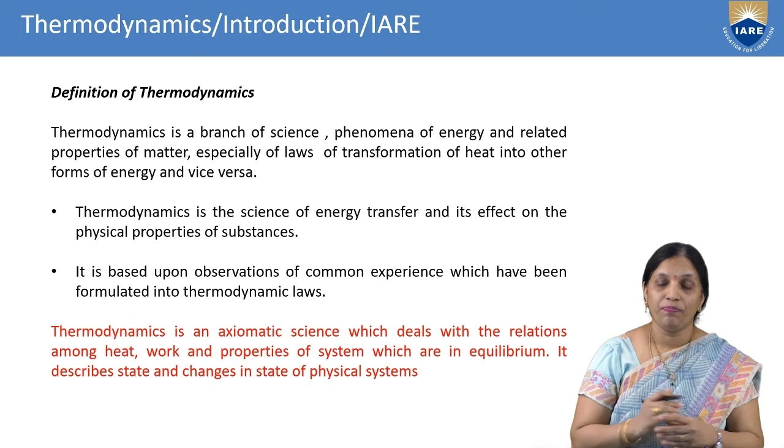Let's see where these thermodynamics are used. Whenever you are talking about some concept, first of all, what strikes in your mind? Why do we have to study this? Where are we using it? What is our application of this?

So when you see the applications of thermodynamic laws or principles, all fields of energy technology, like your power plants, whether it's steam power plant or nuclear power plant, your IC engines, the vehicles you use day to day life like two wheelers, four wheelers, or your gas turbines, your refrigerators, air conditioning systems, propulsion systems, gas dynamics, compressors, and of course your chemical process plants, etc.

So these are all the day to day applications. If you want energy, if you want light at your home, you need a thermal power plant to be there. If you have to convert thermal energy into mechanical energy, this energy transformation is where thermodynamics comes into the picture.

In an internal combustion engine, the combustible mixture burns inside the cylinder and releases energy, which is used as mechanical energy for driving vehicles. So there your thermodynamics comes into picture. If you see day-to-day applications, many engineering technologies, fields, appliances and components are all based on thermodynamic laws and principles.

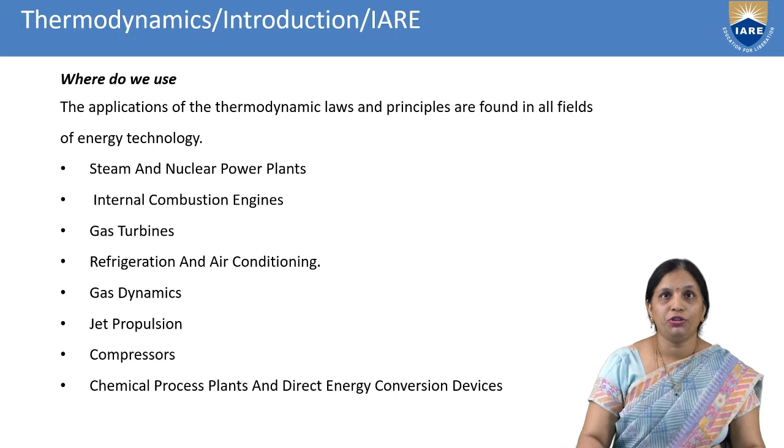So let's see some examples. The first one: what you do in the morning. Once you get up, you require hot coffee, right? If I give you a coffee cup which is very hot, can you drink it? No, you require some lower temperature. How much can you drink? That is energy exchanging in the form of heat. If you keep it there, over time it automatically reduces temperature, maybe to environment temperature where you can drink it, or a temperature higher than environment where your mouth can withstand. So the hot coffee is a major application of thermodynamics.

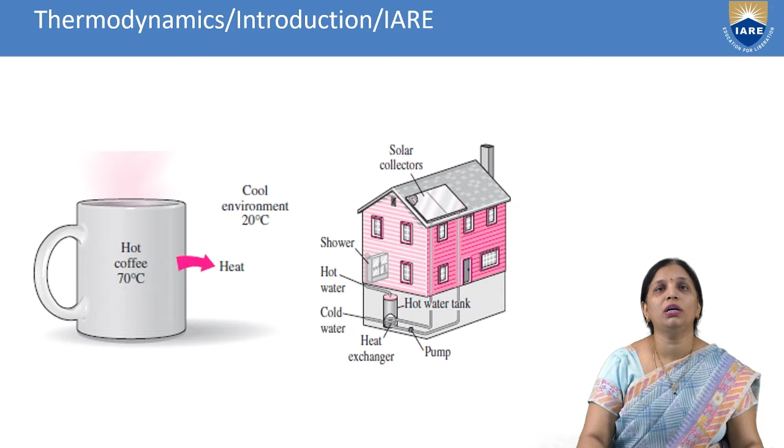Of course, heat exchangers and solar collectors too. Nowadays many industries collect heat through solar energy, using renewable energy sources to also reduce pollution. Hot water, your day-to-day usage of geysers, hot water, cold water, and pumps - every place we have thermodynamics if you look deeply into it.

See, human beings - why are human beings coming into the thermodynamics book? Yes, we are human beings. Now I am sitting here, I am feeling bit warm. If I touch here, I feel warmness. If I want to reduce my body temperature, I have to circulate some cold air over my surface. That is nothing but warmness becoming colder. My body comes to a reduced temperature where I can withstand it. So that is nothing but thermodynamics, energy exchange, your coolers, etc.

These are all day-to-day applications we don't notice. You feel like once you come out in the morning, you have a light breeze on your body and you feel, wow, nice weather. But what does that nice weather mean? It means your body is feeling a nice wind breeze - your human body temperature is exchanging heat with the air coming from the wind. So there you have exchange of temperature, exchange of energy. That is where thermodynamics plays the major role.

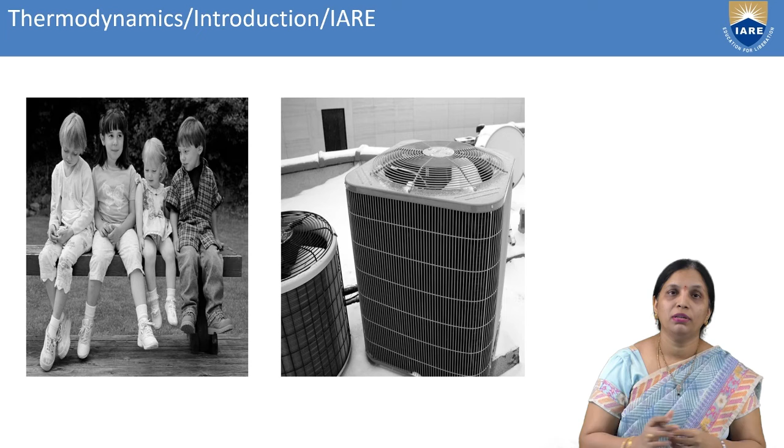So how do we see this thermodynamics? How do we say yes, this is there, that is there, thermodynamics is playing a role? For anything, for any system or concept to understand, you should have some approach to understand that. If you want to go from one place to another, you should have a proper route map to go. That means you need a proper approach to understand that concept.

So to understand thermodynamics, we have two different approaches: the macroscopic approach and the microscopic approach.

So what is this macro and what is this micro? By this time you will understand that the word macro means what micro means - the same English meaning, only we are bringing it into thermodynamics. We are not changing the meaning of the word, but taking that meaning into our technical point of view.

In the macroscopic approach, a certain quantity of matter is considered without the events occurring at the molecular level being taken into account. So what does it mean? What are events occurring at the molecular level? What is meant by quantity of matter being considered?

Suppose I am in a room. In this room, I have considered this place as my approach - this is the place where I have to think of it, where I have to focus. So this is the macroscopic approach. I'm looking into my camera, I'm looking into my TV - these are macroscopic, as a quantity I'm looking into that.

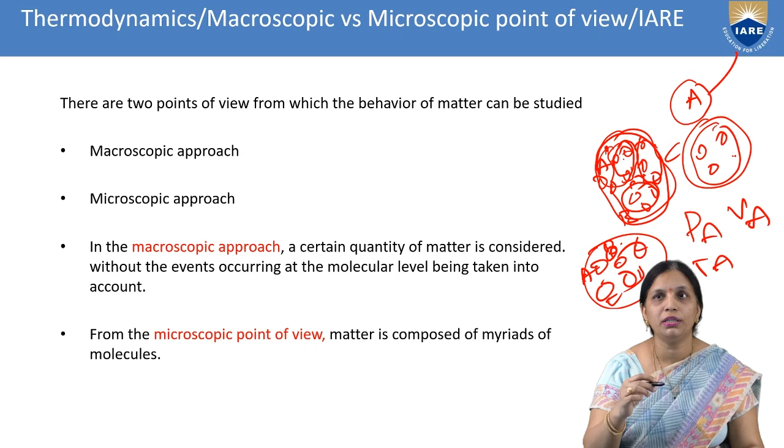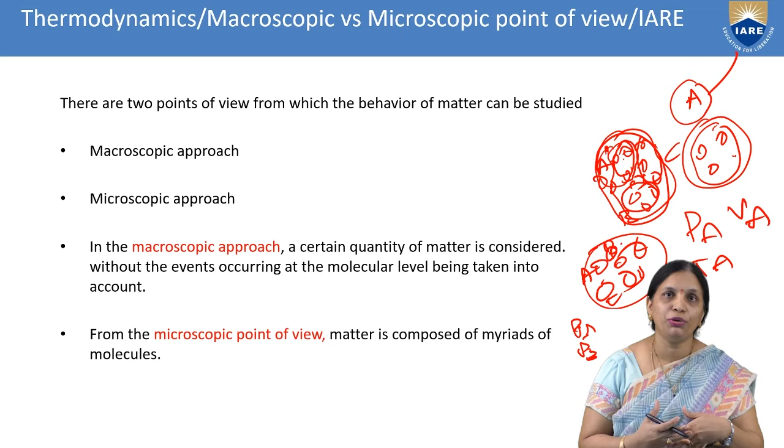So PA, PB and so on - each and every molecule's property I have to take into account and go for the analysis. So these are the two different approaches. Of course, in nature, most of the applications we do with the macroscopic approach only.

So this is the difference between macroscopic and microscopic. Let's see the major differences. Microscopic approach considers that the system is made up of a very large number of discrete particles known as molecules, and these molecules have different velocities and energies.

Whereas in macroscopic, of course you also have molecules, but the behavior of individual molecules won't be considered. The study is of the properties of a particular mass of the substance.

In microscopic, the behavior of the system is found by using statistical methods, as the number of molecules is very large - you can't go randomly, you have to go statistically.

Whereas in macroscopic, it just requires simple mathematical formulae. As we've seen, just dividing into 3 regions A, B, C - once you know the average of A, average of B, average of C, then A plus B plus C by 3 for all the 3 molecules will give the total system's pressure and temperature.

The properties like velocity, momentum, impulse etc., which describe the molecule, cannot be easily measured by instruments, because for each and every particle it's very difficult to calculate properties like impulse, energy and momentum. Whereas properties like temperature and pressure, which are required to describe the system, can be easily measured because we have many methods and devices to measure temperature and pressure.

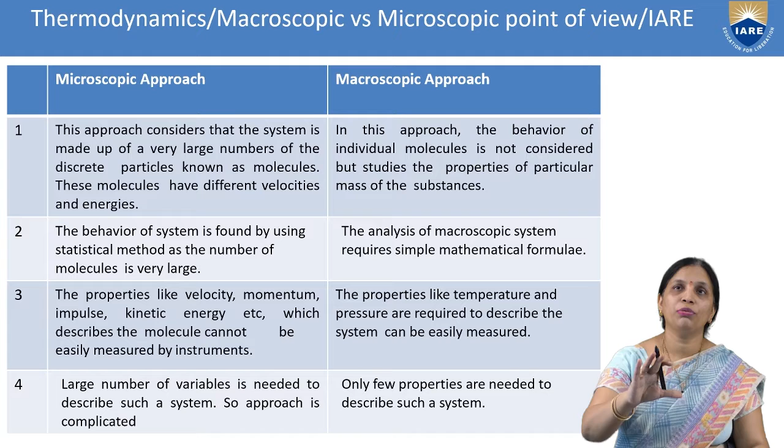So, to study any concept, whether it's thermodynamics or manufacturing technology or production engineering, you should be aware of some terminology for that. To describe something, you need some terminology for that.

That is nothing but the basic definitions, the basic terminology we'll be using in the thermodynamics subject, in the concept of thermodynamics. So, let's see the first and most important one: what is a thermodynamic system. A thermodynamic system is defined as a quantity of matter or a region in space upon which attention is concentrated in the analysis of a problem. So the definition is very clear. It's a quantity of matter or a region in space upon which attention is concentrated in the analysis of a problem. So now I have a system here.

Suppose my laptop, I'm considering as an example. So if you take your laptop, you will be focusing on the video where you are watching only. That is your focus, that is your area where you are concentrating much. Only that portion, whether you want to maximize or minimize, or increase the volume, decrease the volume, you will do for that only. Something else is running behind, but you won't consider about that, you won't deal about that.

So wherever you are focusing, in the total room, my attention is now here. This slide, this place is my attention where I have to focus and deliver my lecture. So this is the region where I have to focus, where I have to analyze. Is this good? Is this safe? Is this neat, can I sit here? Is the comfortable chair there? This is the place I have to focus much so that I can concentrate to analyze the problem. So that is what we call a thermodynamic system.

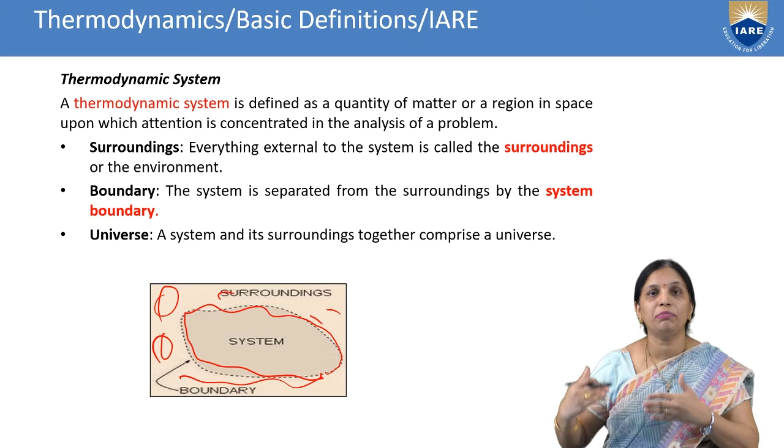So you will be having a door, right? From which your room is separated from the other part of your flat. That is nothing but your boundary. I hope you understood this clearly - system, surroundings, boundary, and universe. These are the most important definitions so that we can focus and analyze. So generally in thermodynamics, we talk about thermodynamic systems and surroundings. These are the terminology which keeps on running behind us to discuss anything about thermodynamics concepts.

So boundary - what type of boundary will you have? As we know, the line separating the system and surroundings is known as boundary. Is the boundary fixed? Not required. Is the boundary movable? Not required. It is adiabatic. So as per some references, with respect to volume and with respect to heat transfer, these boundaries can be classified. So with respect to volume, what do you mean? It's a fixed one or a movable one.

And with respect to heat transfer, your boundary may be an adiabatic boundary or a diathermic wall or diathermic boundary. Diathermic wall is nothing but which allows heat to be transferred. Adiabatic wall is one which does not allow any amount of heat to your system - that means your boundary is fixed, it won't allow any changes. So with respect to volume, we simply say it is a fixed boundary and a movable boundary. But with respect to heat transfer, we say it is an adiabatic boundary and diathermic boundary. Diathermic boundary allows amount of heat transfer, and adiabatic boundary doesn't allow any amount of heat transfer.

The other important definition is state of system. So what is the state? This is a macroscopic condition of a thermodynamic system as described by its particular thermodynamic parameters. So if I want to say what is the state of this pen I am using - yes, this is my system now. So for this system, from a macroscopic point of view, I will explain some parameters: this is in black color, this has one eraser, this has one point. So these are the parameters which describe the condition of this system.

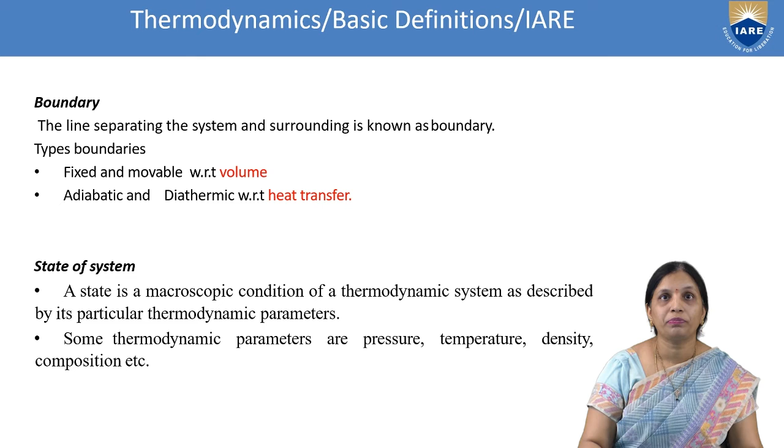And these systems are classified into three categories: open system, closed system, isolated system. So whenever you are talking about something, definitely you need to classify that. Otherwise we can't take it as a whole, we can't summarize, and we can't do any analysis. So thermodynamic systems are broadly classified into open systems, closed system, and isolated system.

So what is this closed system? The closed system means it's having a fixed mass. As we know, thermodynamics itself is transfer of energy, right? Energy means from where to where does it have to transfer - from system to surroundings. So when there is no transfer of mass across the system boundary, we call that system a closed system. You may have energy transfer from surroundings to system or from system to surroundings, but the mass is fixed. If I say it is a 1 liter container, it is a 1 liter container only - I am not changing any mass, I am just changing the energy. So there is no mass transfer across the system boundary - that is called a closed system.

A certain quantity of fluid in a cylinder bounded by a piston constitutes a closed system. A best example which we consider is a piston cylinder device, also used for your IC engines.

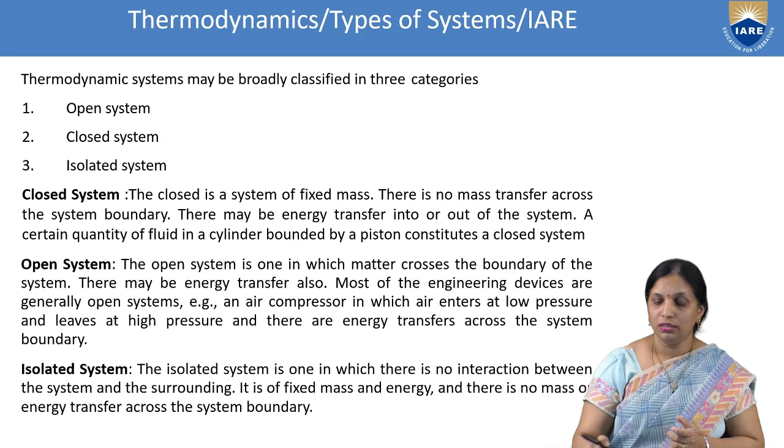So let's see diagrammatically what is a closed system, open system and isolated system. If you observe this closed system, this is the system I have considered. I have a boundary and surroundings, and this is my system. In a closed system, there is no mass transfer, but energy is entering and energy is also leaving here.

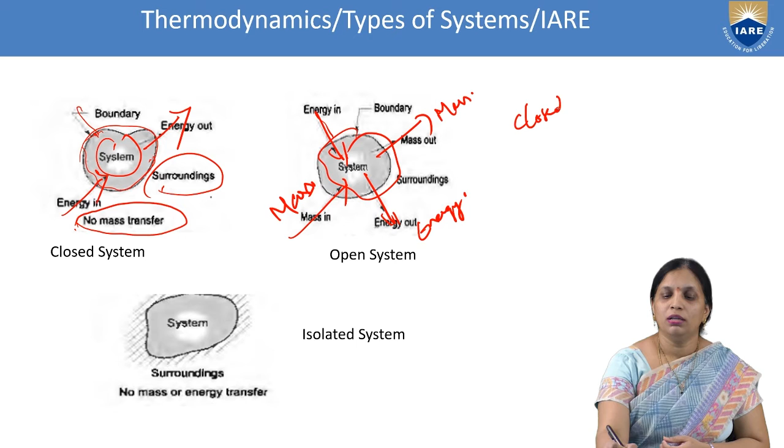The same system, other one - here mass is entering and also mass is leaving. Similarly energy entering, energy leaving. So this is an open system. So I can say: for closed system, you have energy transfer but you don't have mass transfer. Whereas for open system, you have energy transfer and also mass transfer. But for an isolated system, you don't have both.

If you observe, this is insulated. Surroundings are insulated. There is no interaction from system to surroundings. That is what isolated system means.

Most of the applications are open systems only. If you observe a power plant especially - what components will it have? A power plant will have a boiler, a turbine, a condenser, and this is a pump. You have interaction between boiler to turbine, turbine to condenser, condenser to pump, and pump back to boiler, shown using arrow marks. So this is a basic power plant which constitutes a boiler, turbine, condenser and pump.

Take a thermal power plant for example. You supply some amount of heat to the boiler. The water gets boiled and comes out as high temperature steam with high pressure, entering the turbine. Turbine is an expansion device, connected to a generator which converts work into electric work. Then this heat will enter the condenser.

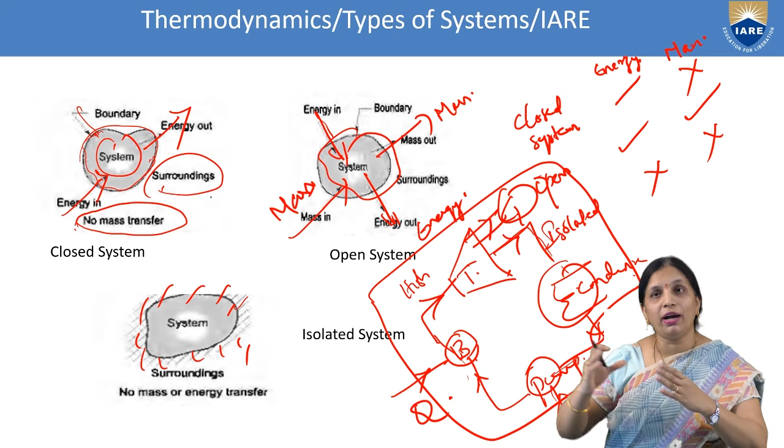What is the purpose of the condenser? The condenser condenses the steam into liquid droplets of water. These liquid droplets are sent to the boiler through a pump, supplying some amount of work. If you see this as a whole unit, this is a closed system. But if you see the individual devices, they are all open systems.

The boiler has both energy and mass transfers. The turbine is also there. So if you see individual components like boiler, turbine, condenser, pump - these are all individually open systems. But when you draw a boundary around all of them, keeping the external as surroundings, that is a closed system. That's why we say individually, all components - a boiler, an air compressor, a turbine, condenser - are open systems in nature, but as a whole, a power plant is a closed system.

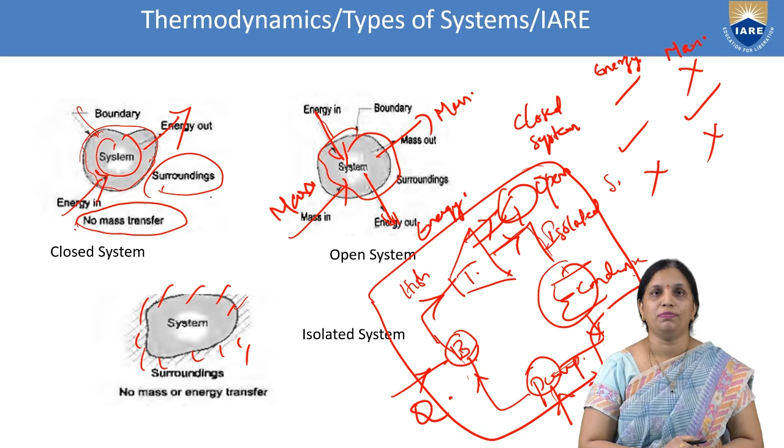The next definition is property. What is this property? We are talking about system, parameters and all. Every system has certain characteristics by which its physical condition may be described, like its volume, temperature, pressure, etc. These characteristics are nothing but properties of the system.

If I say I have a cup of coffee in my hand, and somebody won't tell you it's at a temperature of 80 degrees, we generally won't use coffee at 80 degrees. We simply say it's hot. If you sip it, it will be effective for you. That means you have to describe whether it's hot or cold. The hotness or coldness is described with the property called temperature.

If I give a 5 kg rice bag to a 2-year-old boy, can he hold it? No, we'll say don't hold it because it's very heavy. It's 5 kgs, that is, its mass is high. So to describe any system, you need some characteristics, some properties. These characteristics are what we call the properties of that particular system.

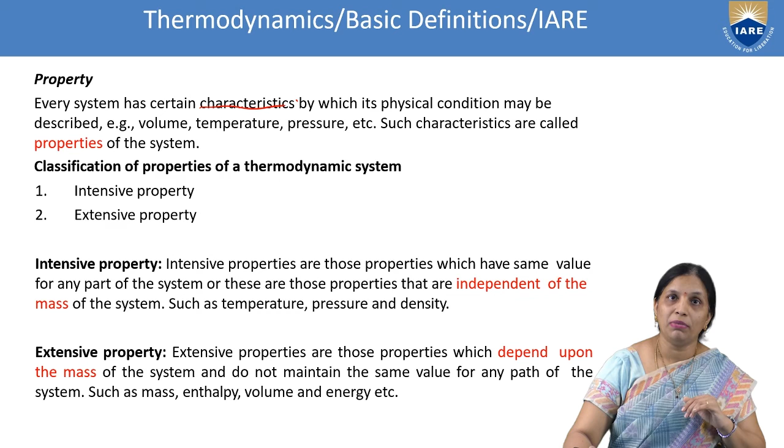So intensive properties are independent of mass and extensive properties are dependent on mass. Note down one more: specific property. A property per unit mass is a specific property. You might have studied in physics specific volume. What do you mean by specific volume? Volume per unit mass is called specific volume.

Till now we don't know exactly what is extensive and what is intensive, but in school you might know volume per mass is specific volume. Now with thermodynamics concepts, we define it as: the ratio of the extensive property of the system to the mass of the system gives the specific property, and that again becomes an intensive property, because it becomes independent of mass when considered per unit mass. So the ratio of extensive property with respect to the mass of the system gives you an intensive property, and those properties we call specific properties.

In thermodynamics, we'll generally use specific enthalpy, specific energy, specific heat. This terminology is familiar from when you were in intermediate or 10th class - specific energy, specific heat. So that is an intensive property.

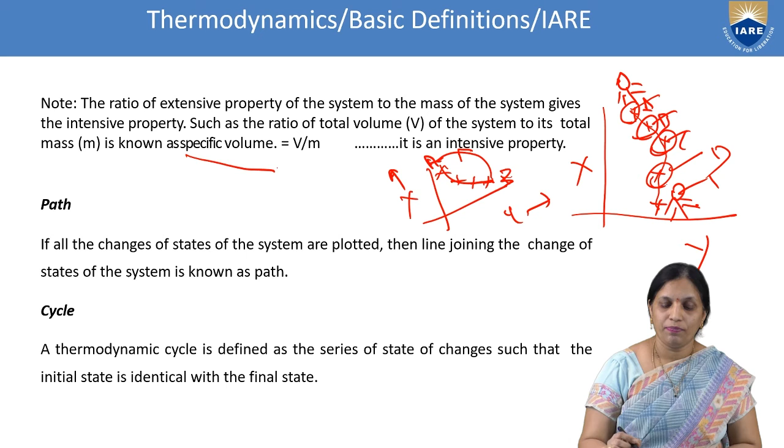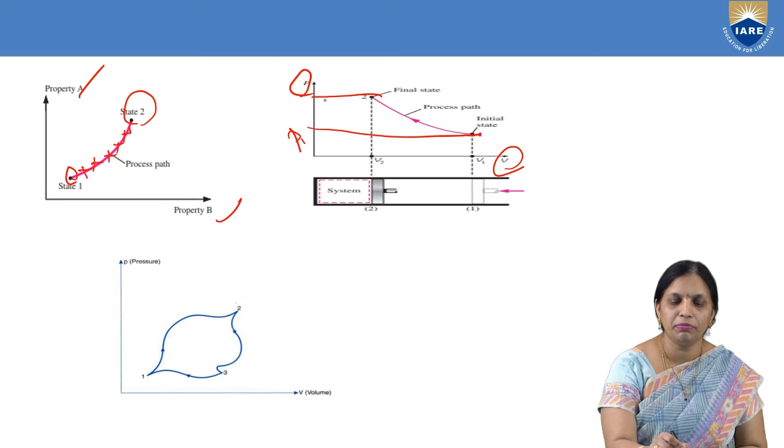Let's advance this figure by changing these properties to pressure and volume. The pressure goes from 1 to 2 - this is my P1, this is my P2. So pressure changes from P1 to P2, and volume changes from V1 to V2. You can observe this arrow mark - so 1 to 2 is the path that has been followed. This is my initial state and this is my final state.

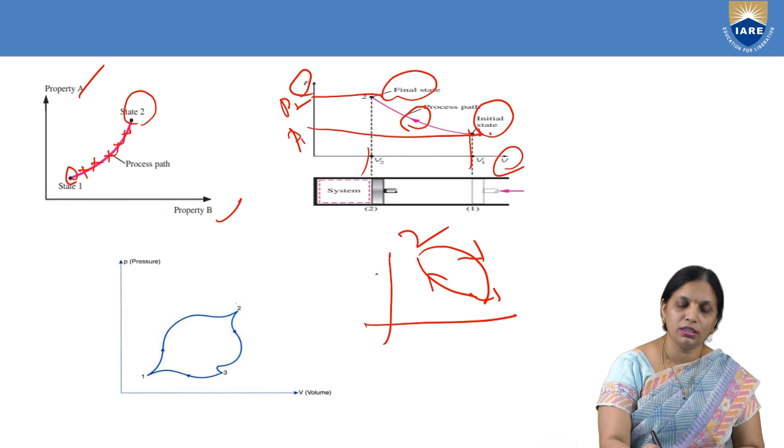When I come back from 1 to 2, and then from 2 back to 1, that is called... now I can say this 1 to 1 is a cycle. It is not required to have only one path - you may have more number of paths, but the final state of the system should be identical to the initial state. You have to understand the word identical.

We are not saying equal, because with properties there must be a minimum error. You might have a minimum error, but you may have many paths. The final state must be identical to the initial state - then we call it a cyclic process. It may follow any number of processes in a device, but your final state should be identical to the initial state.

Let's take this example: I followed path 1 to 2, call it A, 2 to 3 is B, and 3 to 1 is again C. So 1 to 2 is one process, 2 to 3 is another process, 3 to 1 is yet another one. Now I reached back to my initial point where I started, that is point 1. So this I'll call a thermodynamic cycle.

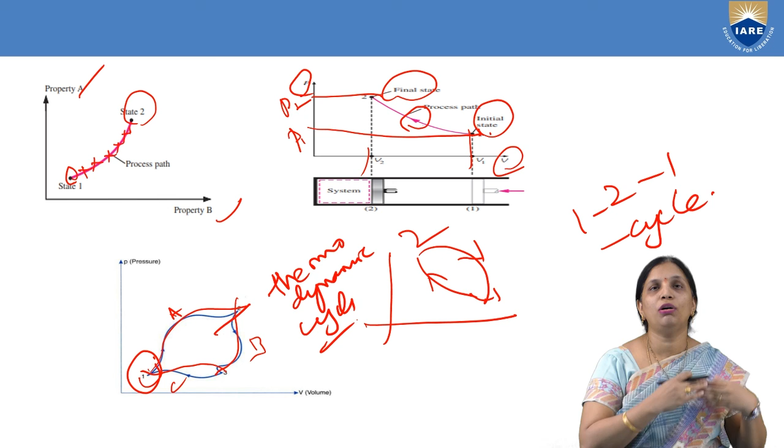A process, path, change of state, state point, change of state, path, process, and a cyclic process - these all relate again to the system only, where your focus is made, where your attention is concentrated for analysis of your problem. So that is the basic definition of thermodynamics. These are the terminologies you will carry throughout your thermal subjects - thermodynamics, thermal engineering, whatever - a system, a process, cyclic process, system undergoing, etc.